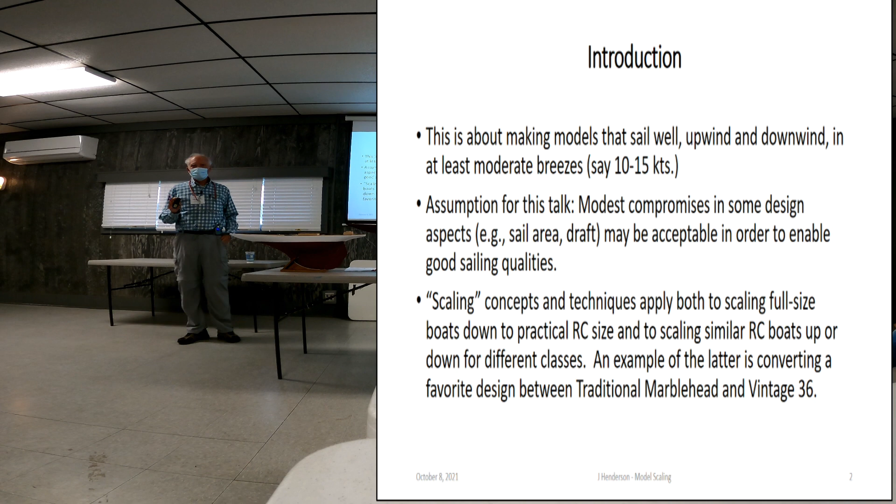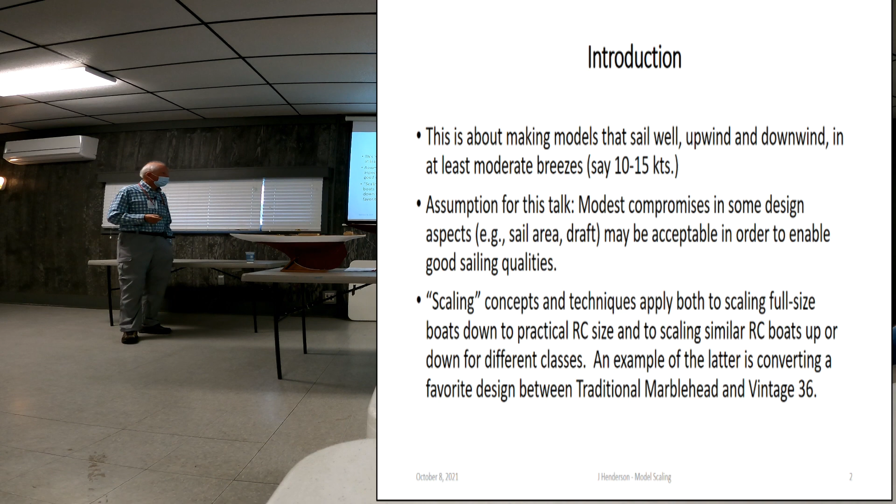The trick here is we want models that look as scale as we can make them, but that sail well in at least moderate breezes. I'm going to assume for the purpose of the talk that you're all willing to tolerate some modest compromises in the design in order to enable good sailing. This will apply whether you're starting with a full-size boat and scaling it down to model size, or whether you're going up from one model to another, or down, say, from a Traditional Marblehead to a vintage 36.

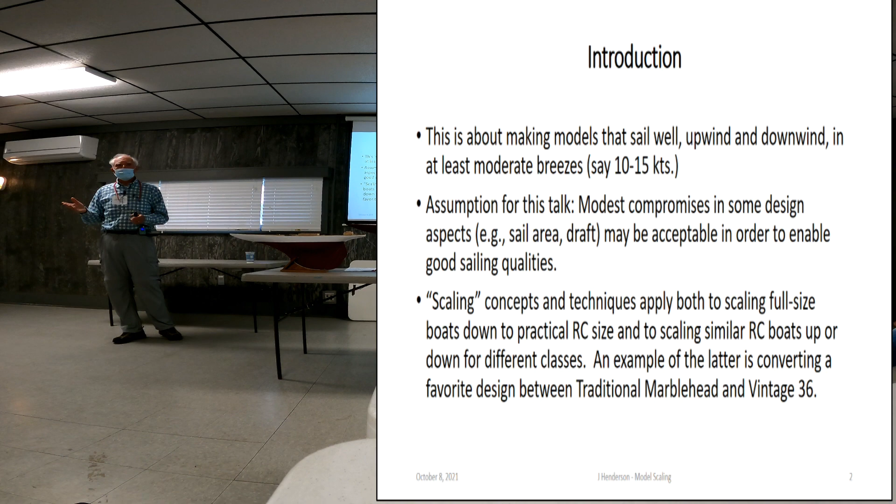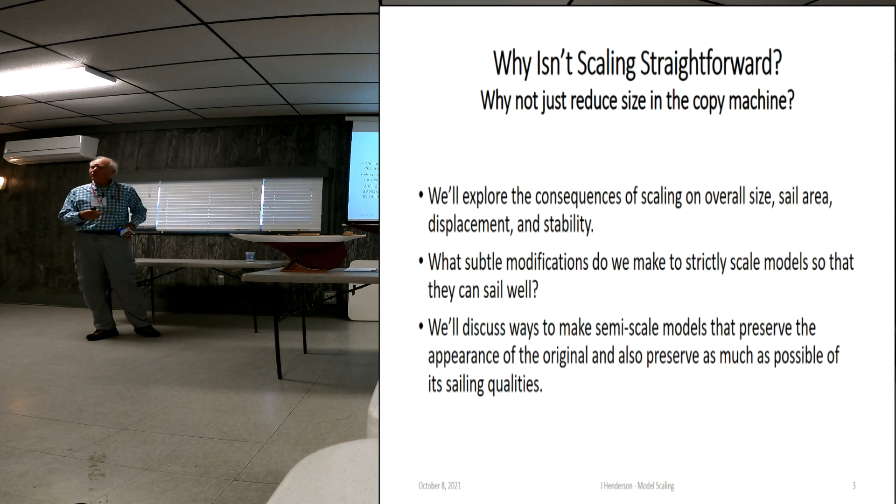So why do we need to talk about it? Why can't you just take it to the copy machine and reduce the size? Well, it turns out it just doesn't work that well, and the talk is going to make you understand why that is and what we can do to mitigate the problem.

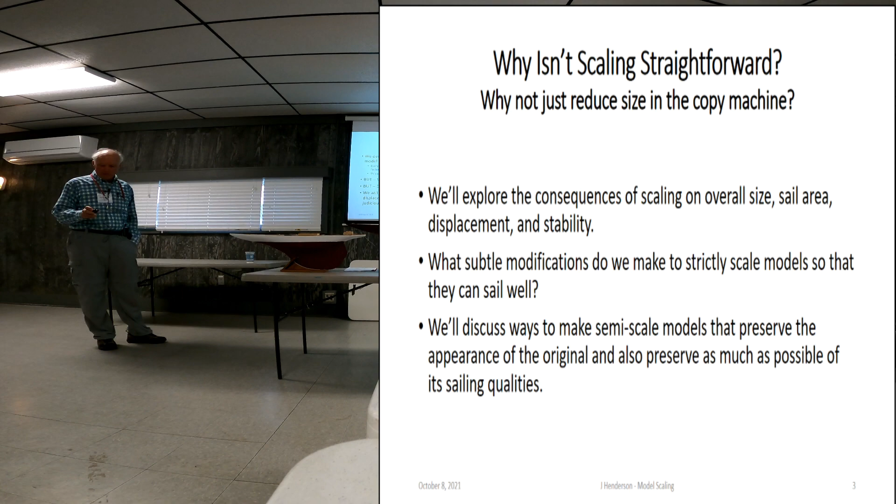The fundamental concept, and I'm going to beat on this fairly hard for a few slides, is that we're going to imagine scaling by some factor. I'll pick 10 to make the arithmetic easy. That means every linear dimension on the boat — the length, the waterline length, the beam, the draft, the luff of the sail, the foot of the sail — all get scaled by that same factor of 10. That's what happens when you build a display model. It looks real because every dimension has been adjusted. But, two buts: the sail area is going to go down by the square of that factor, and the displacement is going to go down by the cube. That's the topic I'm going to beat on.

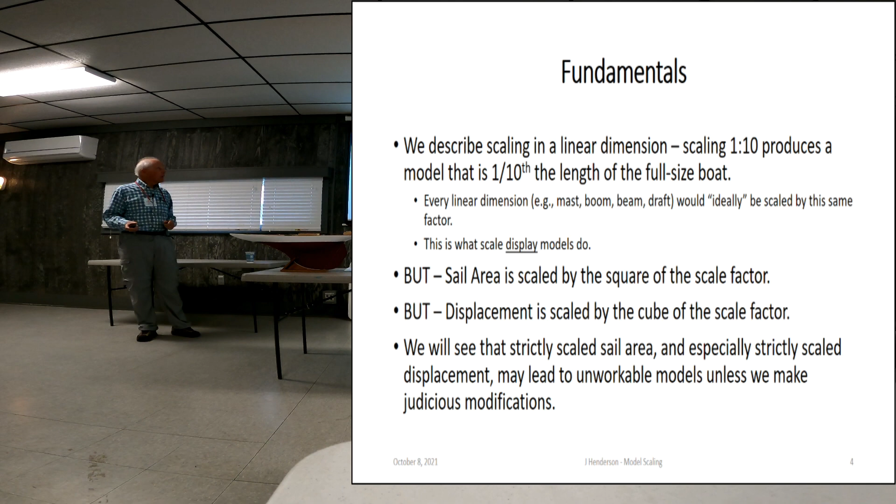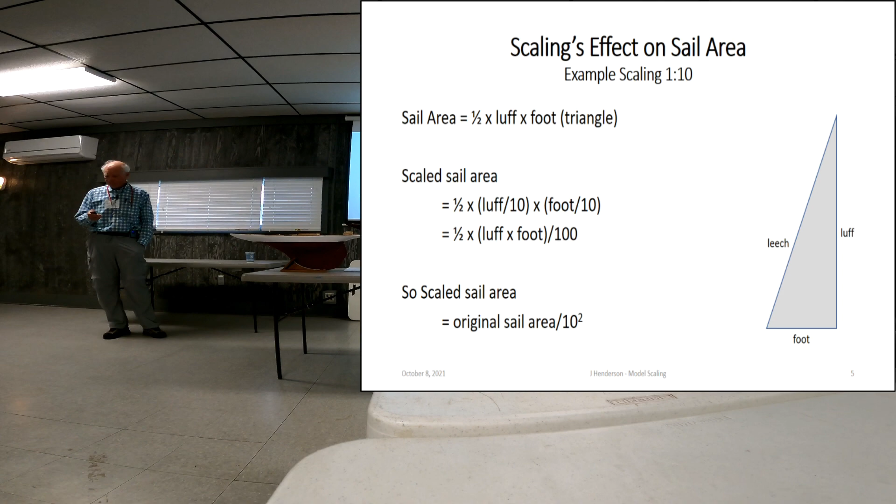Now, to talk about displacement, first I want to set the stage for what I mean by displacement. It's the amount of water — the volume of whatever is beneath the waterline in the boat. That means it's the amount of water that gets displaced when you try to float the boat. From high school physics, Archimedes said that the weight of the displaced water equals the weight of the boat.

The other way to think of the experiment is: take a tub brim full of water, put the boat in it. Obviously water will overflow. If you capture all that water and weigh it, that's the weight of the boat. I've talked about displacement mostly in terms of weight, but it's also volume — in our case, cubic inches below the waterline — and we can relate that to weight because we know the density of water. Salt water weighs 64 pounds per cubic foot, or a more meaningful number for us, 0.037 pounds per cubic inch. So if we know the cubic inches beneath the waterline, we'll know the weight of the boat that will displace that much water if it floats at its waterline.

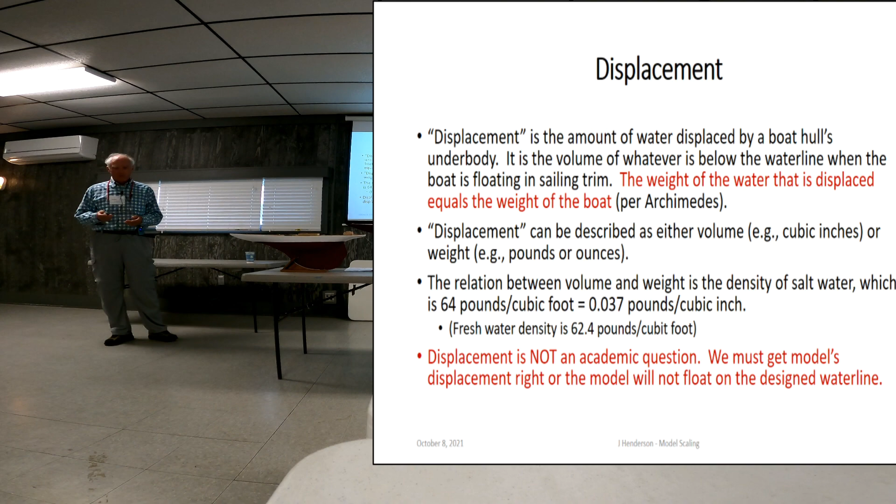Now, I could almost stop — that's the talk, everything else is commentary and examples. But I beat on that because you really need to internalize it. That's kind of a brutal arithmetic when you start applying it to models, as we will see next.

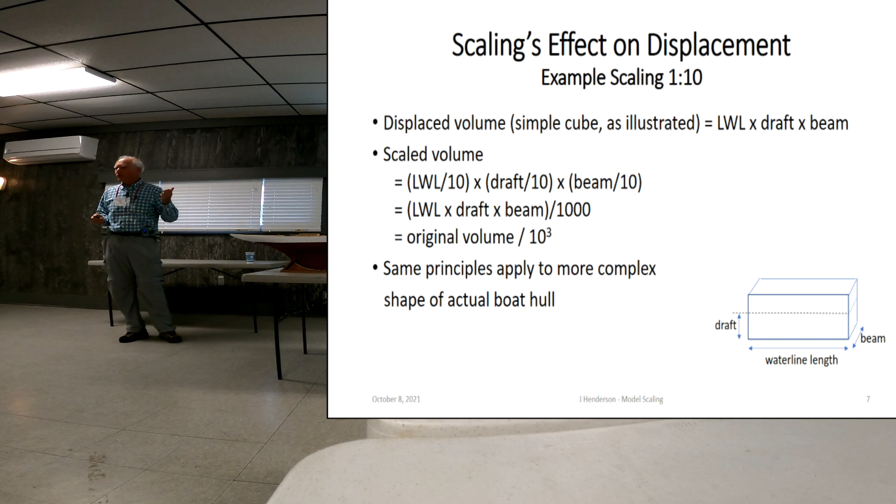So this is a really extreme example. I started with a J class. I picked Rainbow because I had the plans for Rainbow. And I reduced it to vintage 36 size.

And in fact, this is it here. And so now the scale factor, since Rainbow is about 129 feet long, the scale factor works out to be about 43. So that's a big scaling problem. And so we started. So the length goes down to 3 feet because that was the point of the exercise. The waterline length reduced accordingly, the beam.

The sail area turns out to be quite close to the vintage 36 sail area, and you should not take comfort in that. That's actually part of the problem. The original was really over-canvassed by typical boat practice, and the vintage 36 at 600 square inches is no sissy on over-canvassing either. So the fact that it turned out to be close to the 600 square inches allowed actually meant even more worry for getting a scale boat that would work.

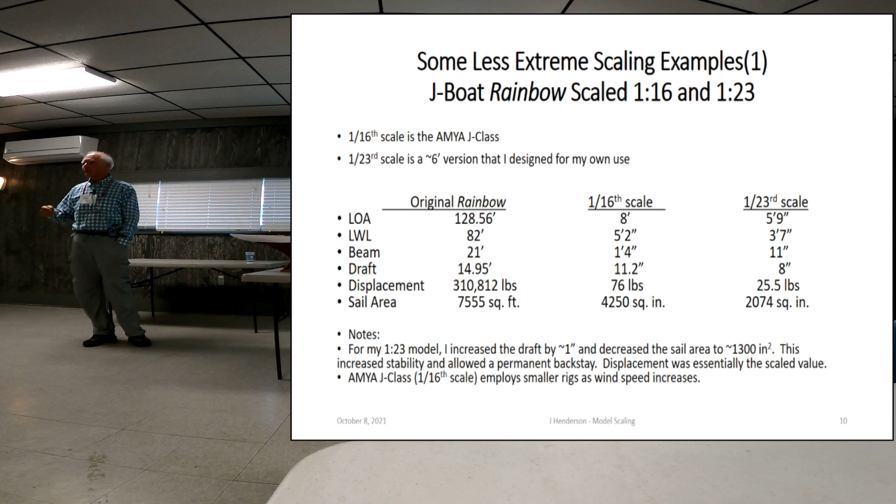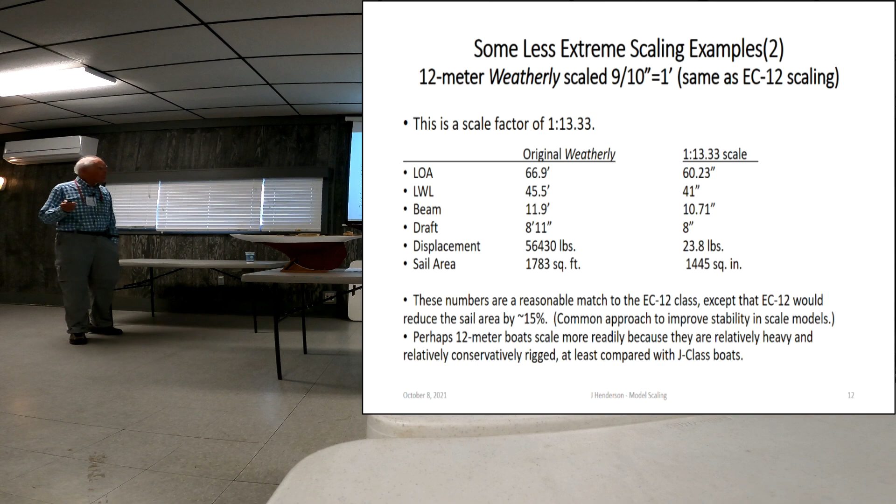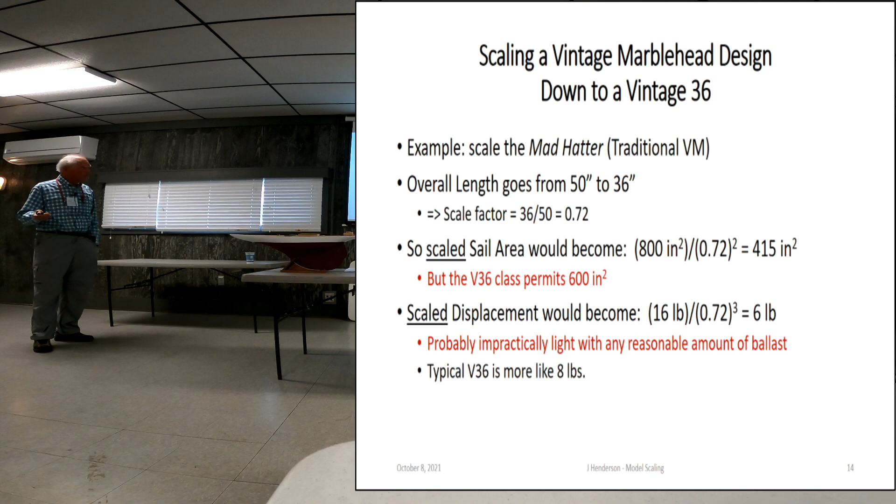So how do we deal with that? Let me first summarize what I think are the trigger points that should generate your questions if you're considering scaling down a model.

First of all is the relative weight and sail area of the full-size boat. We saw that the 12 meters scaled more readily than the J boats, and the J boats were probably even easier than some of the earlier America's Cup boats. I suspect working schooners would be sensibly rigged, and therefore might be good candidates for scaling without a lot of work in the underbody.

The model class may impose some issues. If you want to make it a V36, for instance, you've got maximum sail area, maximum draft, and there may be specifications not only on the draft but on the aspect ratio of the keel. Usually there's a minimum chord width that they require. Sail area displacement is a metric often published in popular sailing magazines when they describe new boats, and we're going to talk a little about how that applies to models.

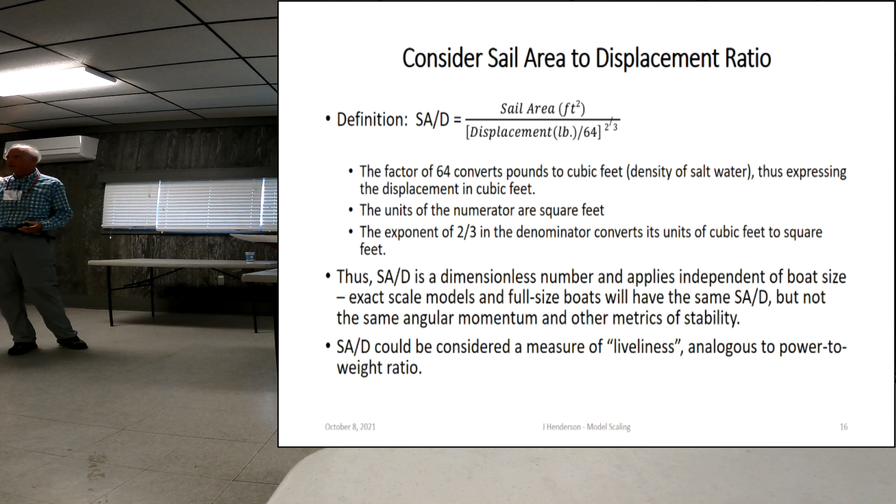But it is a dimensionless number - both the numerator and denominator end up with units of square feet. Dimensionless number means it's the same for all sizes, so your model boat will have exactly the same sail area displacement ratio as the full-size boat if you strictly scale it. That does not mean it has the same stability. Stability is a function of a whole lot of other things, like angular momentum, for instance, because how quickly does it respond to puffs, and how much the boat weighs. It's sort of fundamental - big boats are more stable than little boats, even full-size big boats are more stable than full-size smaller boats.

Remember the Fastnet race of some years ago, when there was loss of life and loss of boats - the small boats suffered more, and that's simple physics. Well, not simple, but physics. I think sail area displacement could be considered more a metric of liveliness - it's like horsepower to weight ratio in a car. It's a little bit related to stability, but it's not a determinant.

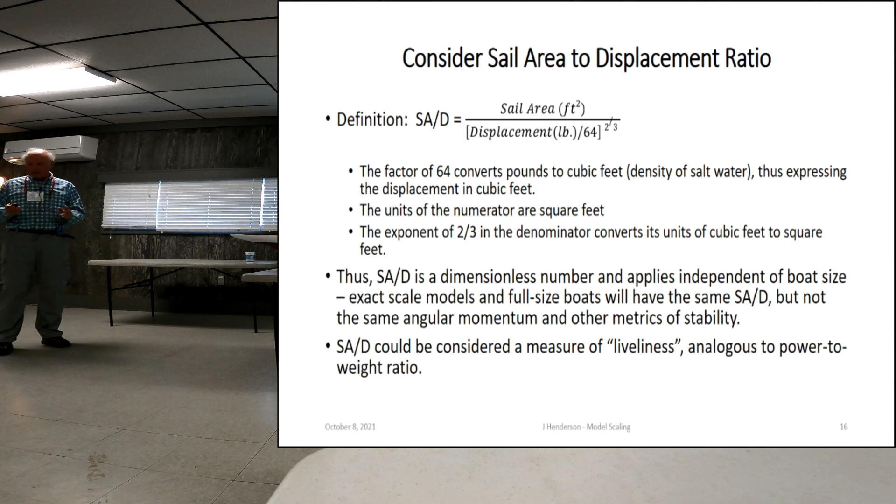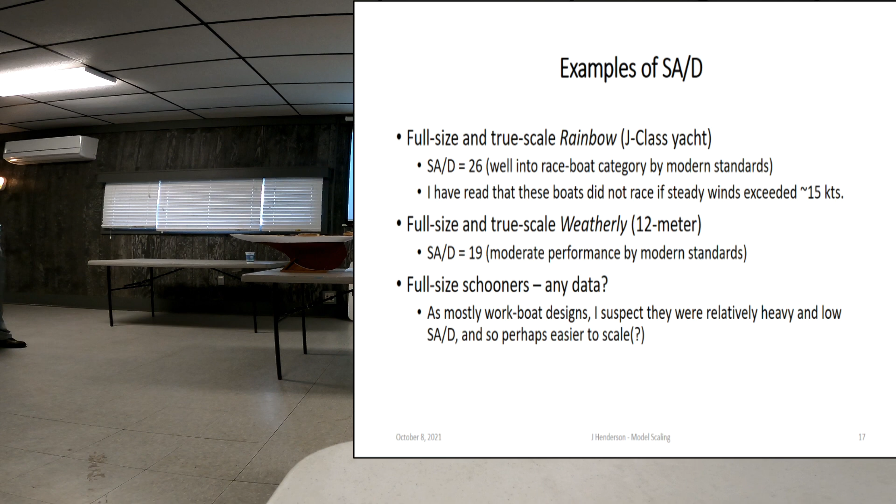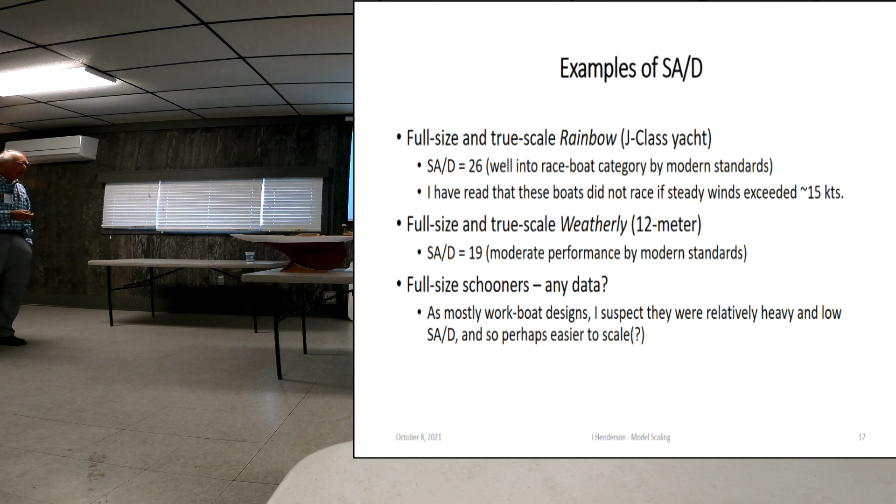So just for numbers here on full-size boats: the Rainbow, a J-class, would have a sail area displacement ratio of about 26, and that's well into the race boat category by modern standards. The 12 meters would be more moderate, with a sail area displacement of about 19, and today that would be considered a lively cruising boat, but not a full-out race boat. I don't have data on full-size schooners - if someone does, send it to me, because I suspect they would be relatively conservative also.

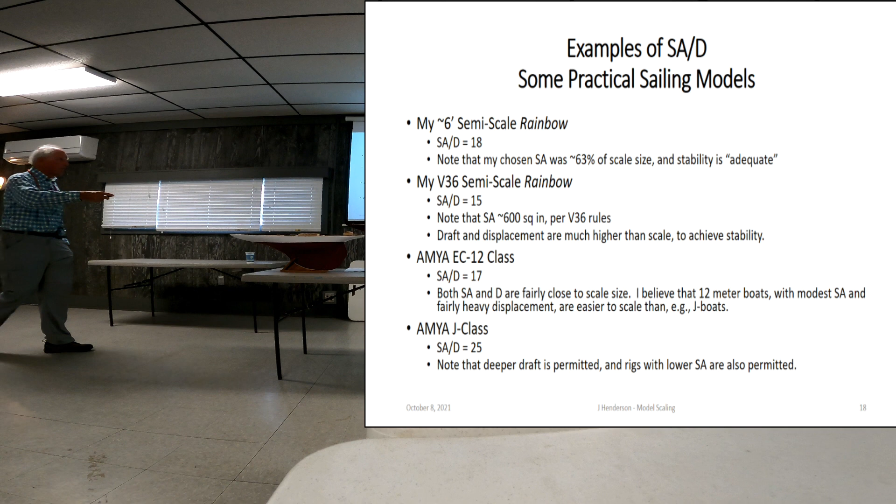Now, some sailing models. This one, the 6-foot Rainbow, has a sail area of about 18, which is more like the 12 meter. It's certainly not as aggressive as the full-size J boat. My smaller Rainbow, this one, is only 15. Again, smaller. I thought I had to be more conservative about that.

The EC12 class is 17, which compares. It's a little bit more conservative than the full-size 12 meter, but it's comparable. And the J class, the same way, just a tiny bit more conservative, but very comparable. Although both those classes permit smaller rigs when you need to, so that's their workaround.

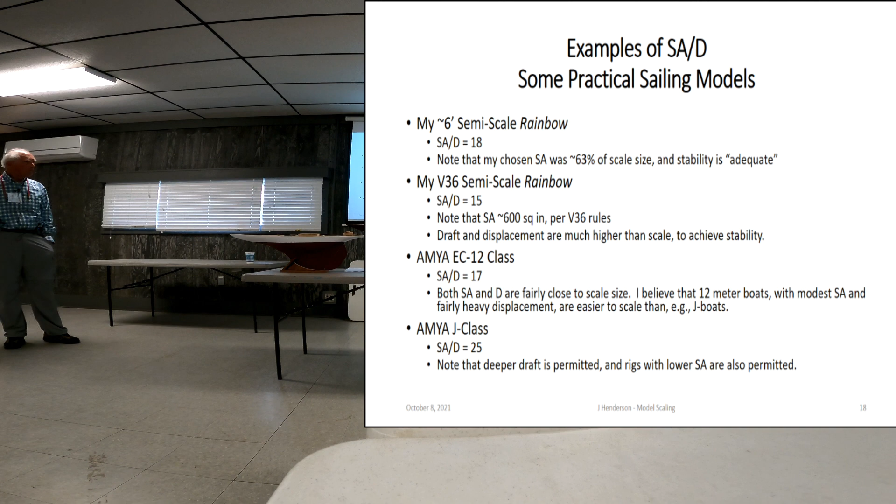All right, to apply all this, you've got to look at the lines drawings of the boat, and I love these lines. Okay, this is Rainbow. It's a Starling Burgess design. These are his drawings, and our models won't have those many lines in them, but all the elements are there.

There's the profile view, the sections view here, and the top half of this is the water lines, which run this way. Those are the key elements of any set of plans. Those would be the elements of what you buy if you ordered plans from our website. And they're what we manipulate to make the changes we need to make, and these are the things that instruct us in what the shape will end up being.

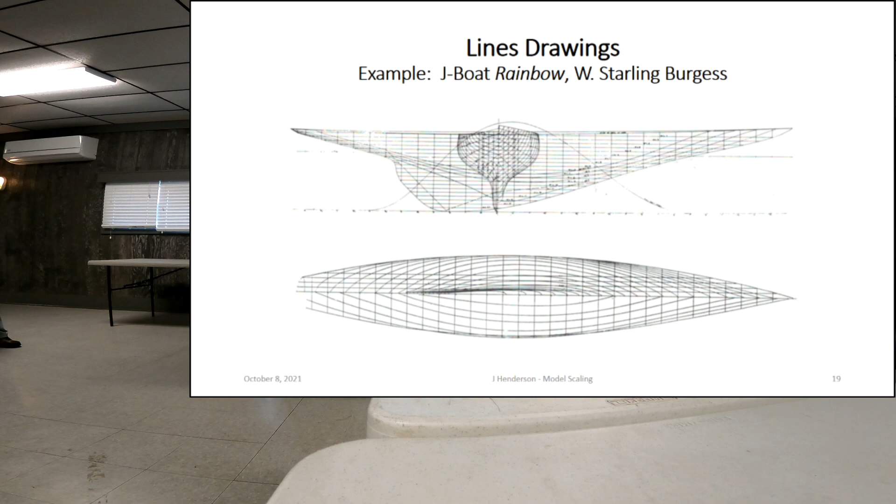So these are the same drawings but simplified. This is more like what we would buy for models. Again, the profile and the sections and the water lines. Now the profile shows vertical lines here, and those correspond to these sections.

Now there are these horizontal lines. The main one right here is the load water line. Imagine if you slice the boat this way. As you get down here, these lines are going to reveal the underbody shape, and that's what we're seeing here. This curve that I'm trying to trace out is the load water line.

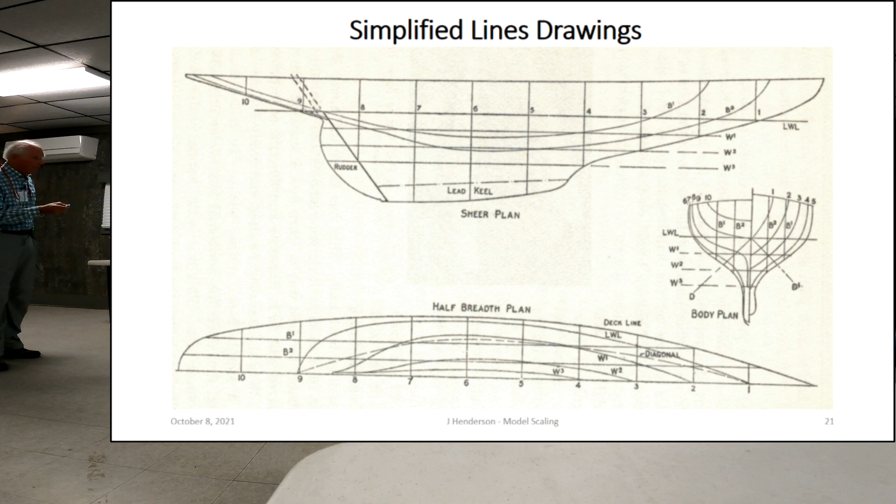This one is a parallel line to that, but below it by this distance. And then there's another one here and here, and the outer one here is the sheer line, the deck line. And you can see right away there's some odd things happening. See these funny little curves back here? The water line comes around like this, the lower ones come in like this, and that's what's going on in the back of the boat, in front of the rudder post.

And it's a characteristic of full keel boats like this, that back here, the shape changes dramatically. We're going to talk a little bit more about how I worry about that. But here it's revealed, and it's pretty brutal.

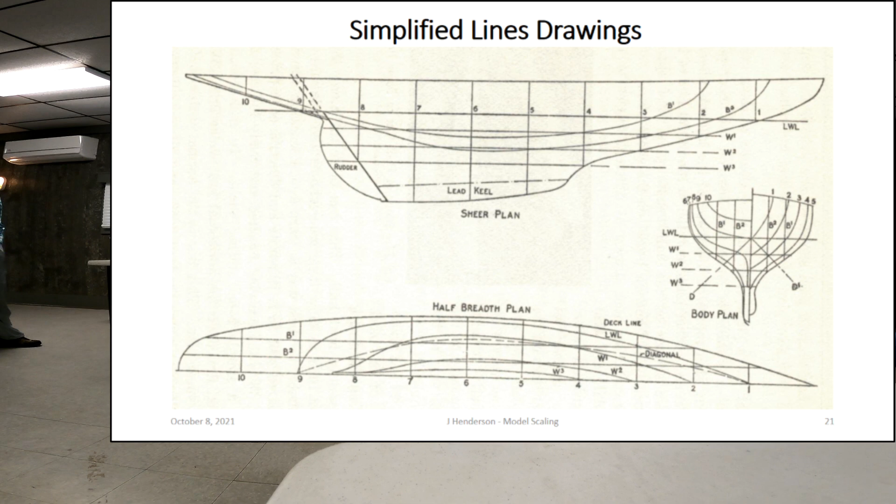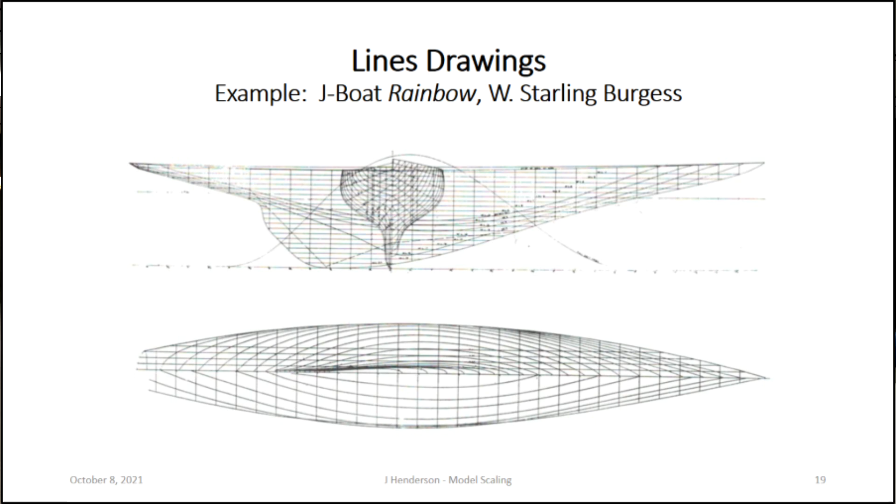Can we go back one? Yeah. You can see Starling Burgess, there's some of that, but much less. This was a boat with less underbody volume than the next one. And one of the consequences of that is the shape.

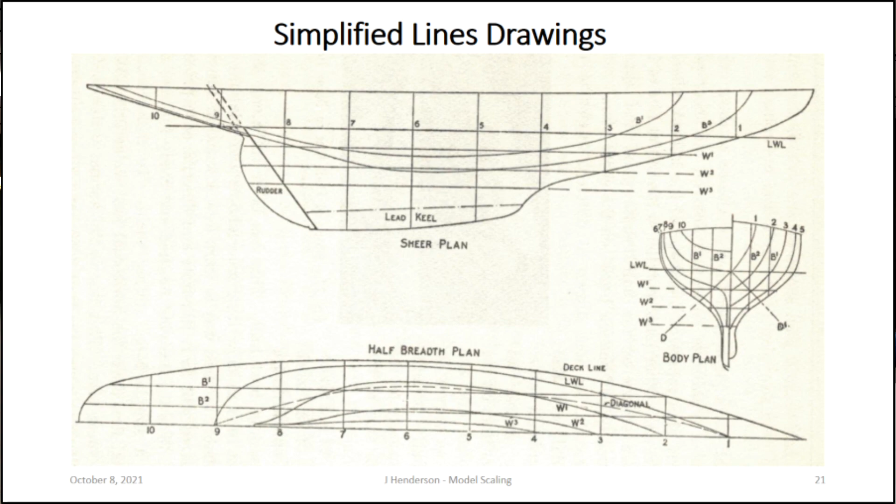Okay, let's go on. I've talked about most of this, I think. The three views: one, the profile, the sections, and the water lines. Let's go ahead one.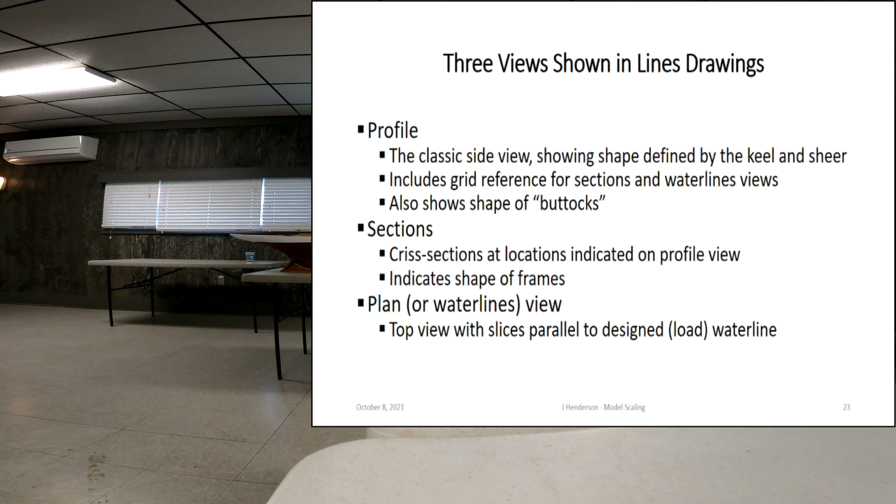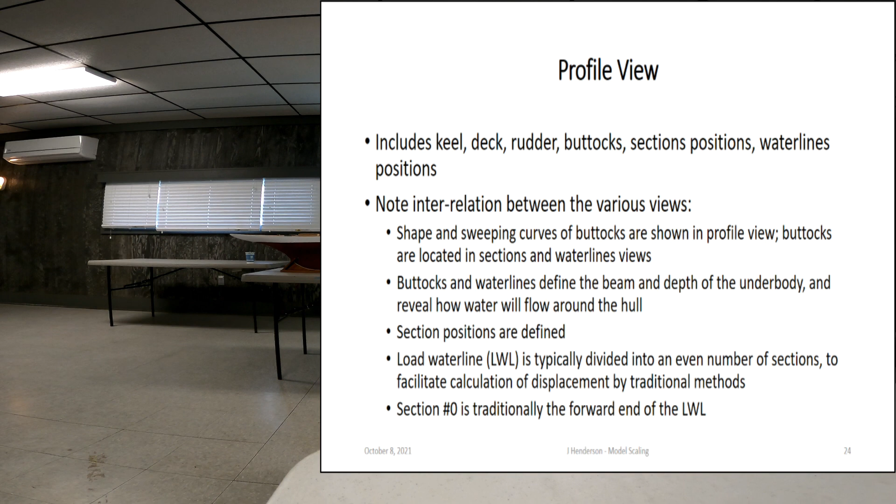The profile view, I did not show buttocks. Can we go back to? Yep. These vertical lines here, these are lines I'm talking about that would slice the boat parallel to the center line, only moved out toward the maximum beam point. And when you plot them, viewed, so you make that cut and then you view it, right? So if you did, the profile comes out like this, but these others would be smaller and follow curves like this.

And that shows kind of how the water's got to flow when it's passing under the boat. But also, deeper, heavier boats, with these buttock lines would curve down more. And that's a warning. I mean, sometimes you just have to do it to get the volume you want, but that will have impact on wave making and therefore on speed.

So I'm going to beat on that again a little bit more, but I want you to try to remember, when I talk about the buttocks lines, it's this curve here that I'm talking about. The slices parallel to the center line of the boat, but further out. Okay, ahead. One more.

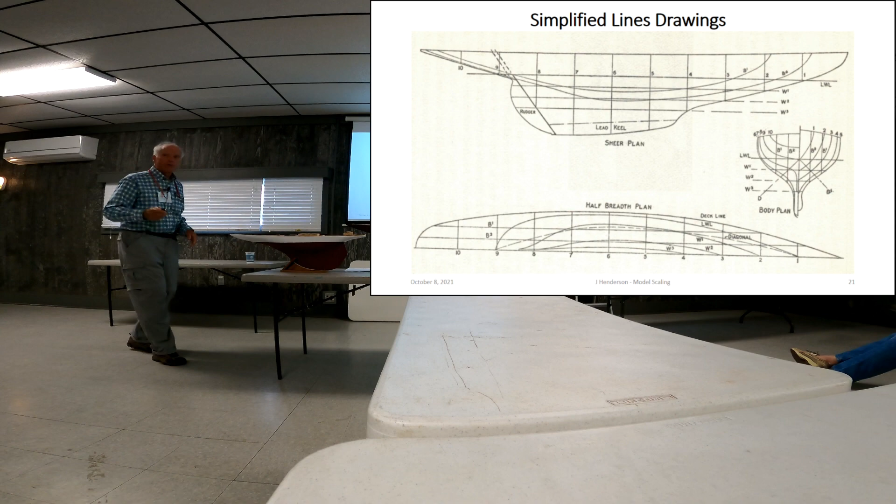Okay, the sections. The sections are the slices across, like this.

We use those as the basis for our frames or molds when setting up the building board. Those sections are usually drawn to the outside of the planking. In fact, almost always, and if they're not, there'll be a warning on the lines that they're not done to the outside. They have to be done to the outside because they're used for calculating volume, so to know the volume of the underbody, you have to go to the outside of the boat.

When you use those as the basis for your frames, you have to remember to take away the thickness of whatever planking you're going to use. I typically use 1/8 inch planking, so I'll lay out the sections full size and then reduce them all the way around by the 1/8 inch thickness of the planking.

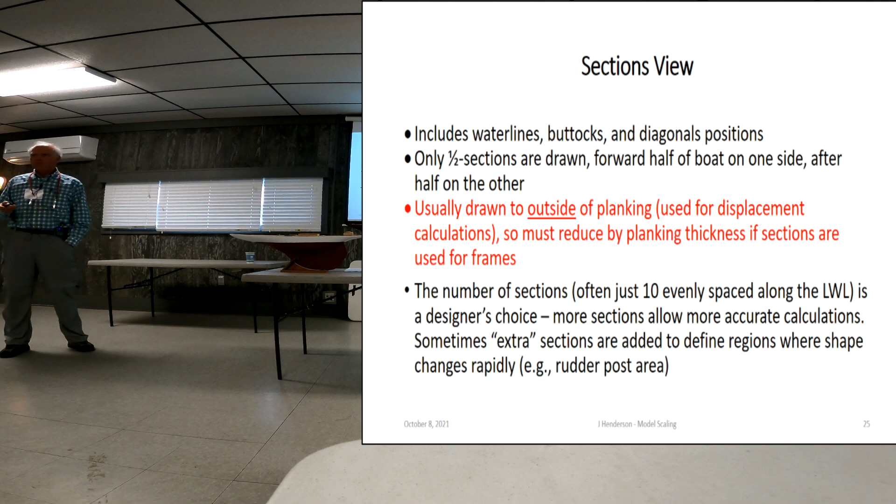The number of sections, almost always at least for traditional design practices, will be an even number along the waterline. You have an even number of sections evenly spaced along the waterline. The number is a designer's choice, but that enables displacement calculations.

I won't have time to go through that, but one of the articles I wrote in our journal talked about some displacement calculations. The key thing is Simpson's rule. If you want to look that up, check Simpson's rule in something like Skene's Elements of Yacht Design, and it'll explain how and why we need to do the sections like this.

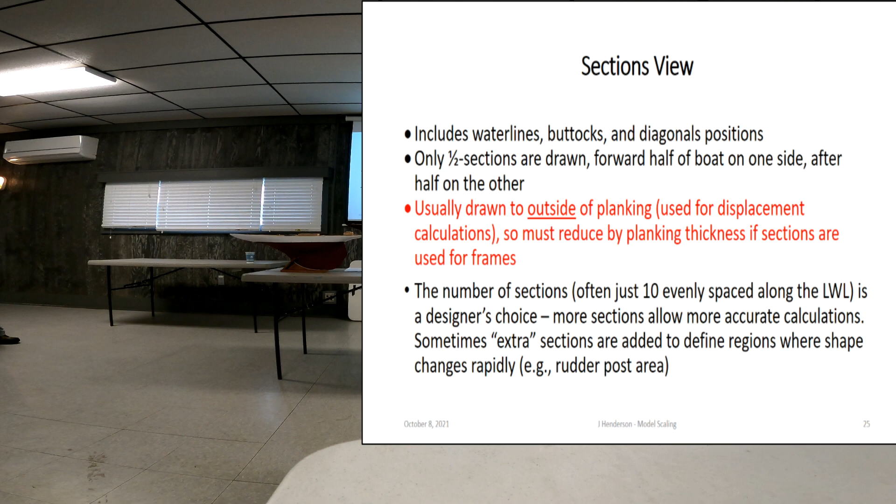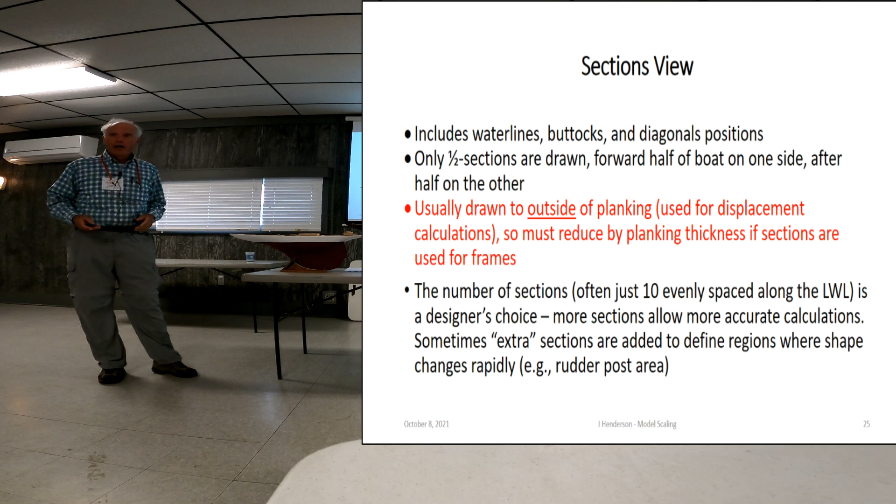We might want to add extra sections on the drawing and in our frames, back in areas where we saw how the lines changed. If you want to add them, think through how the drawings work, look at the profile and the waterline views, and make yourself a new set of sections in between the ones the designer provided.

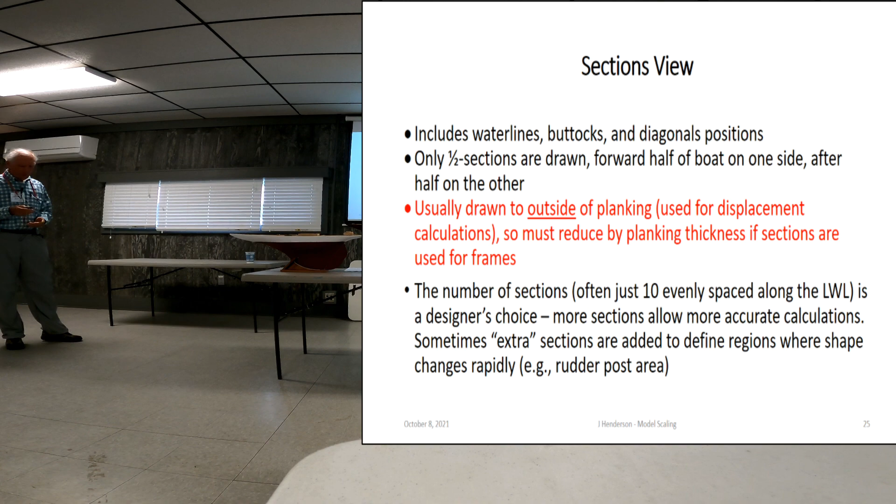Okay, I think I didn't talk about diagonals, but we can go ahead. I think designing boats is not for sissies.

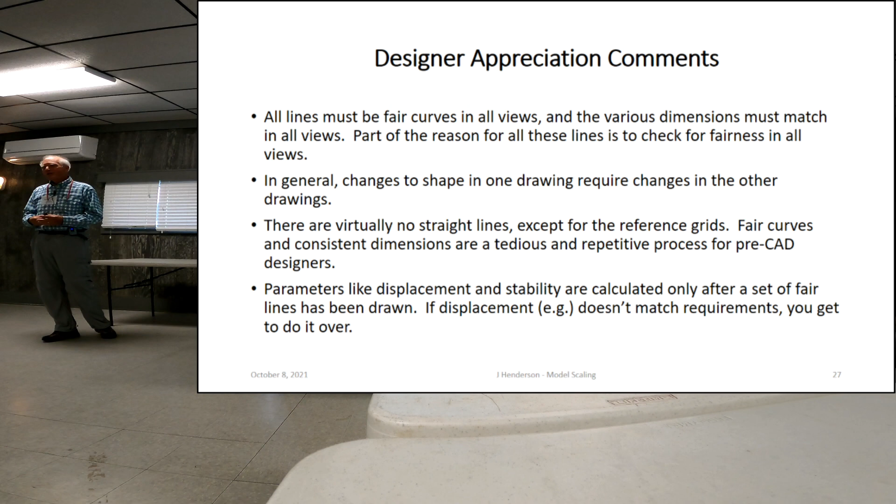It's tricky. It's not like houses where everything's straight lines. The only straight lines on the plans are the reference grids, which don't show up in the boat anyway. So all of those curved lines have to be fair individually.

They also have to relate perfectly to each other, so that the width of the waterline as shown in the waterlines view has to match the width of the waterline shown in the sections view.

The typical design process would be you start with a profile, because that's the thing you think of first, and then maybe you draw the middle section, the biggest section, to get some idea of the shape of the boat. Then you start filling in other waterlines and other sections.

After a while, unless you're lucky or more skilled than I am, you box yourself into a corner and some of those lines don't make nice fair curves anymore. And if you fix up the one that wasn't fair, then you have to go back and chase down all the changes you have to make in the other three views to make it work. So get yourself a big eraser, because it's a lot of redoing.

After you're all done and you think the lines are really pretty and you've drawn your waterline, then you get to calculate the displacement. And if it isn't as big, or if it's too big, then you get to do it over. So if you undertake this, even for modest things like scaling, where you have a pretty good starting point, it's still an iterative process.

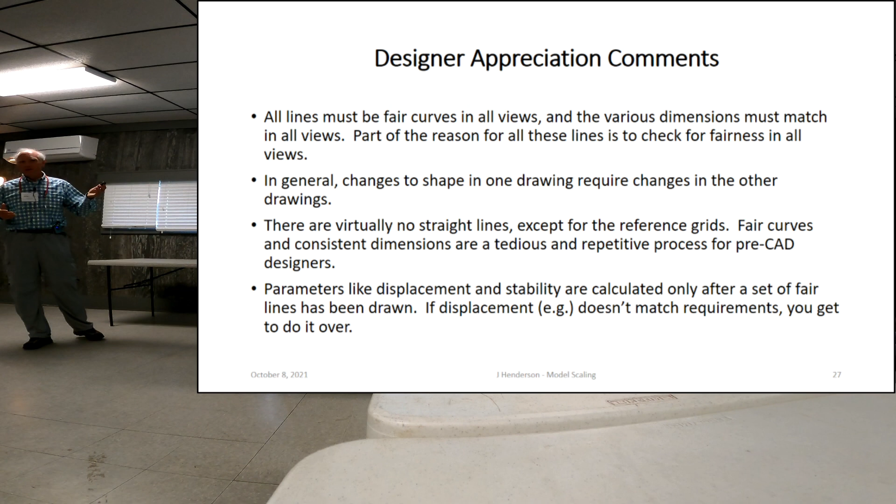These are the lines drawings for the Vintage 36 Rainbow, which was the most aggressive scaling of anything I've talked about. If you try to hark back to Starling Burgess' original lines, you can see some changes. First, the good news: if this is the waterline here, above the waterline it looks like a J-boat. That's almost an exact scale of his above the waterline.

Below the waterline, in profile, you can see that it's much deeper than the scale would have been, even deeper relatively than the larger boat. And the sections—his sections would have curved in a little bit more, but to get volume, I brought these down more like this.

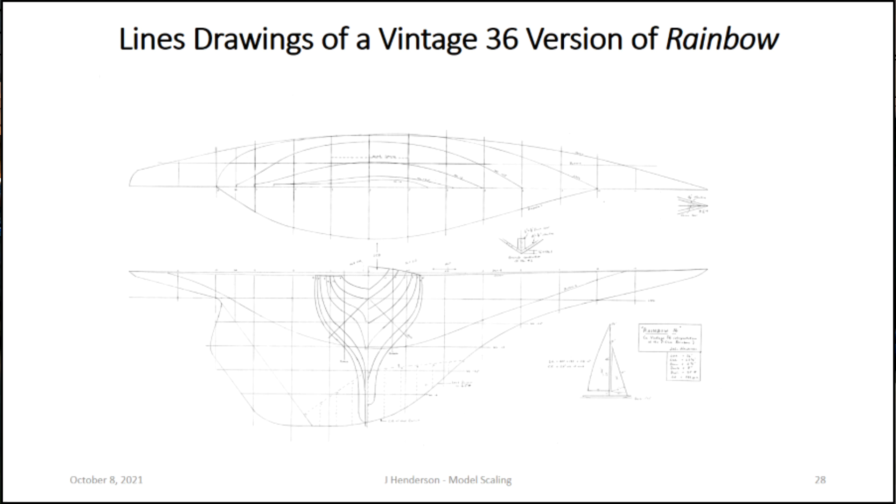So the whole trick here was to gain necessary stability by both increasing the draft and increasing the volume below the waterline. That's what happened to the plans. And I had alerted you before about the impact on the buttocks lines. I have one buttocks line only drawn, but see it curves down like this - that's a much steeper curve than the other one, and that's also a consequence of having to get the necessary volume. Okay, now I'll go ahead one.

Okay. One more? It's loading? Okay. Yeah, this one will be slow, I think.

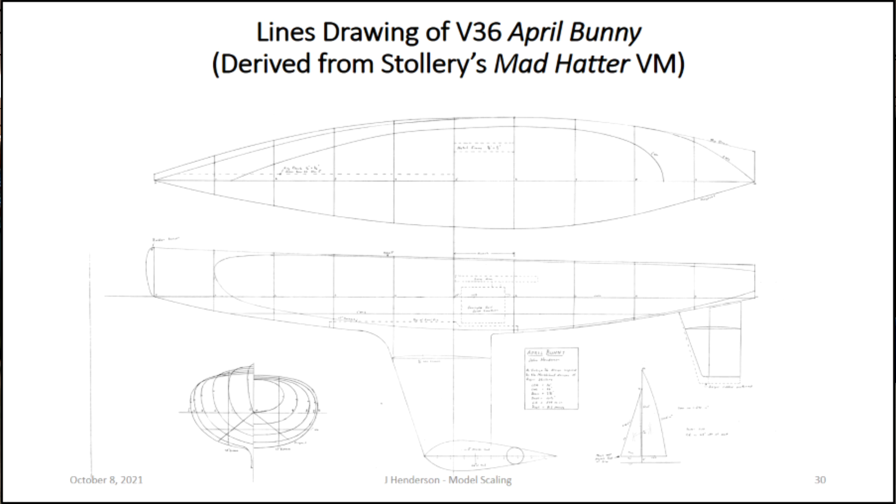All right, and now this is the boat I called April Bunny, which was derived from Roger Stollery's Mad Hatter. As I said when I talked about it first, the visual cue for this boat is the complete roundness of the sections. Not round, but the lack of hard edges in any of the sections. I'm going to show you this a little bit deeper than his, but in general, this made a fairly successful Vintage 36.

And now let's go ahead. Here is clear what I did. The solid line is Roger's Marblehead scaled down to 3 feet, just shrunken on the copy machine. The dashed lines are my modifications to it. The main one here is it's deeper in draft, and that picked up the bit of extra volume I needed to get the 6 pounds scale displacement up to about 8 or 8.5 pounds that I used for the model itself.

Now the draft is also deeper, and that had nothing to do with the scale problem. It's just an artifact or an oddity of our class rules. The draft limit for the traditional Marblehead is 12 inches, and the draft limit for the Vintage 36 is 11 inches, which means the Vintage 36s are actually proportionally deeper. So not being completely stupid, I took advantage of that and gave it a 10.5-inch draft, and I also made the rudder a little bigger. But the big effect here is the change in the underbody to give me a little extra volume.

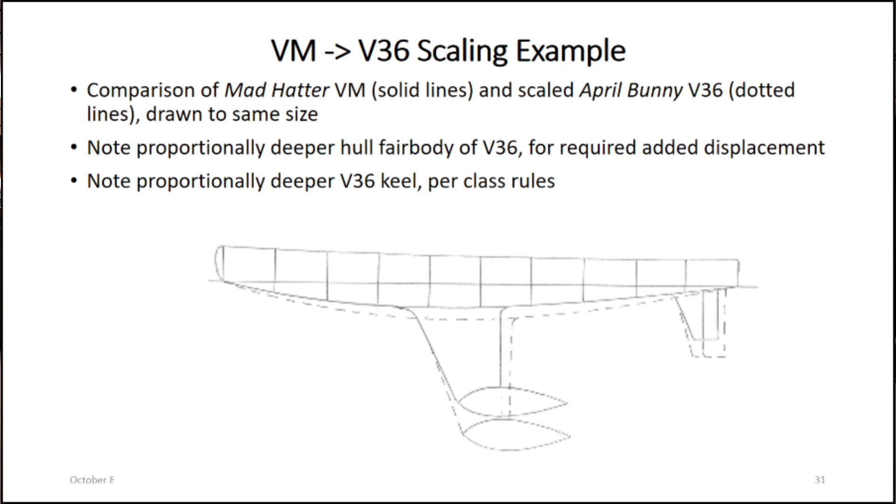Okay, I think we've done this enough. Appearance.

We want it to look scale as much as we can, but we're sacrificing scale appearance on the shelf so that it'll have some chance of acting like a scale boat when it's in the water. And so as many of the changes as possible are going to be in the underbody.

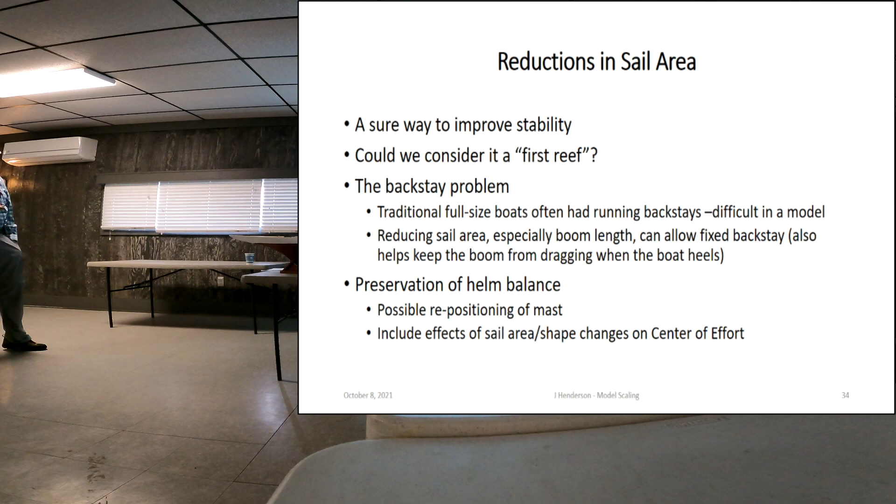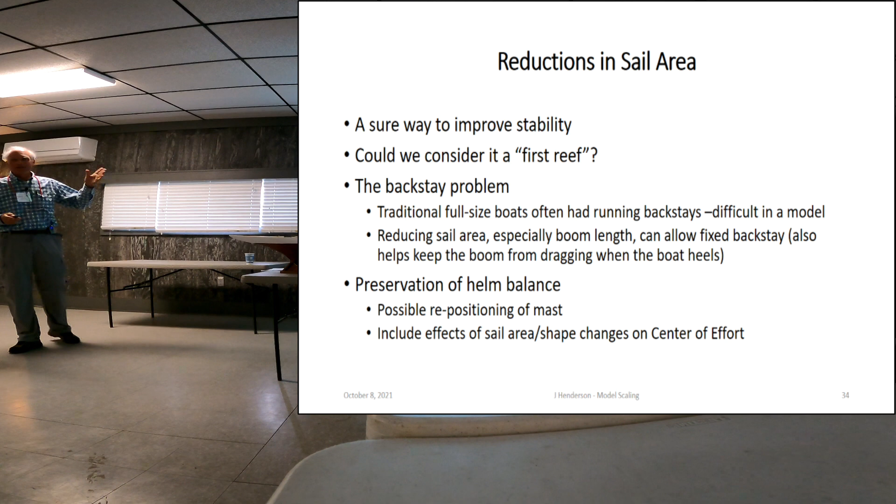We could reduce sail area, and if we're concerned about our arguments to make it a scale boat, we could consider it a first reef. There's another issue though, and that's the backstay problem. Most of these old boats had long booms extending out past the transom, which meant they had running backstays. Well, I suppose we could do it, but it would really be awkward in a model. So one of the ways you can reduce sail is to shorten the boom, and that means you could then put in a permanent backstay. I think the EC12s do that, for instance. That's step number one to make a practical model: give yourself a permanent backstay and reduce the sail area.

Also, when the boat heels, the long boom tends to drag in the water. Now the old boats either didn't have boom vangs, or they had a crew member there ready to release the vang and let the boom ride up when it hits. We don't - when our booms drag, we've got a problem. First of all, you can't ease the sail out anymore, and secondly, you can't steer.

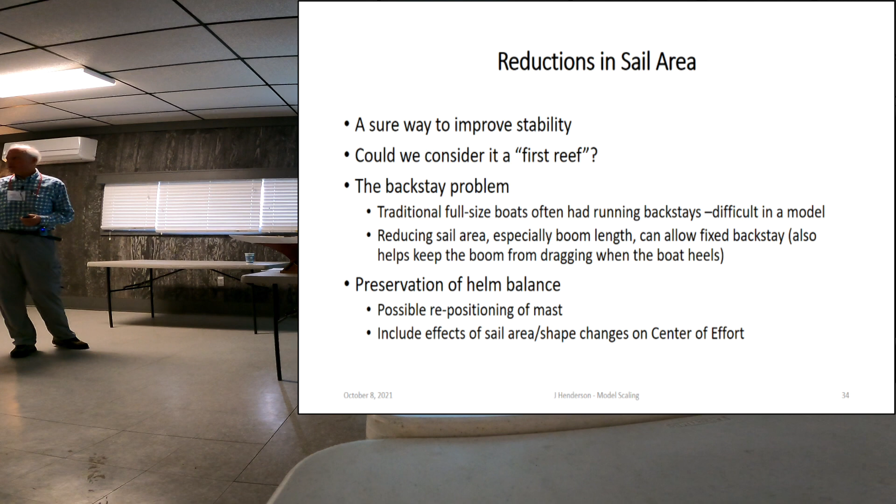And the last thing is helm balance, and by that I mean weather helm versus lee helm. If you reduce the sail area, there's a risk you'll change the center of effort of the sail plan unless you're careful. If you change that center of effort, you will screw up the helm balance. So as you're reducing, pay attention to that, where the center of effort was.

I don't have time to get into calculating the center of effort, it's not very hard, but I think I discussed it in at least one of my articles, and it may be a tech topic in the future.

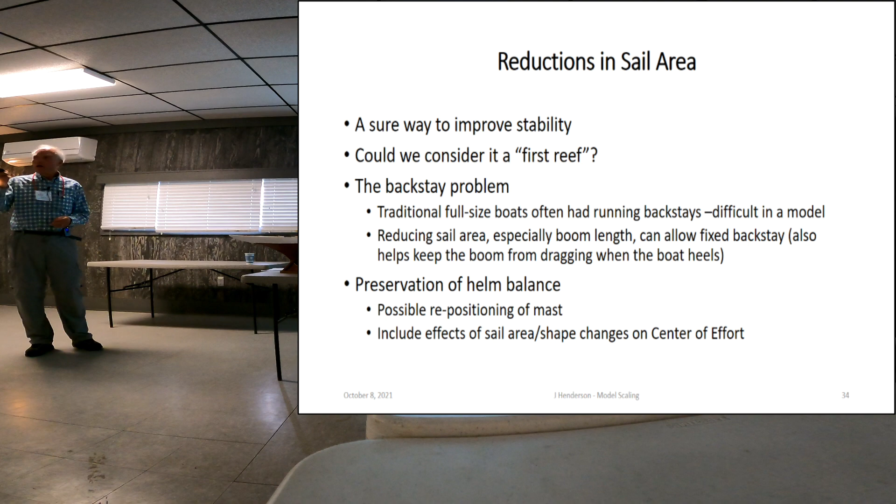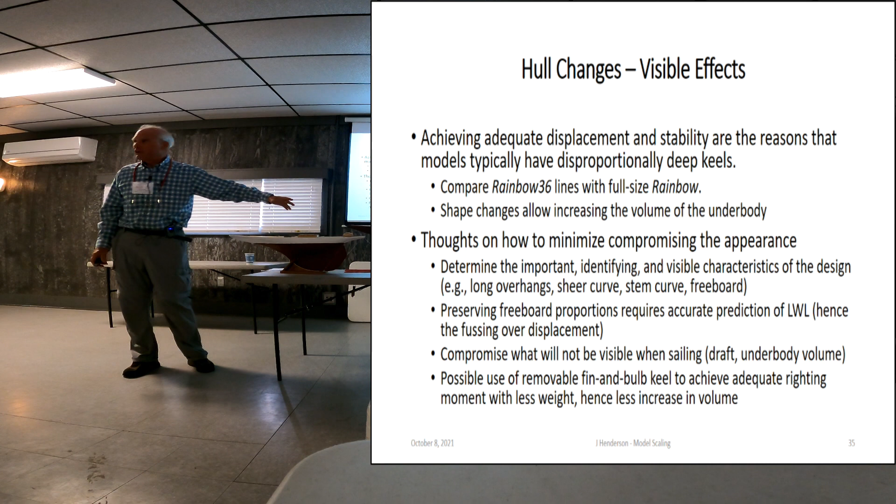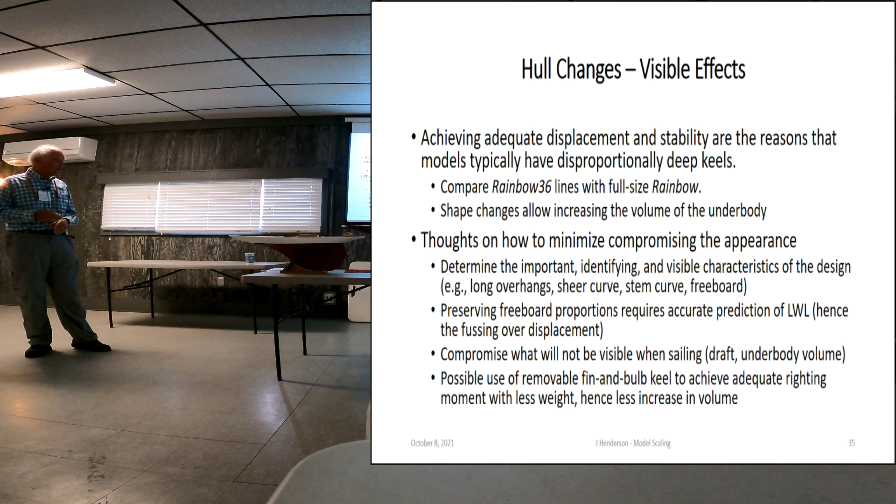Now, the hull changes - the real issue is how do we avoid compromising the appearance? I think the first step is to identify the most important visual characteristics of the model you're trying to do. At J-boats, the visual characteristics are long overhangs, bow and stern - that's a biggie. The shape of the sheer, the amount of freeboard, the shape of the bow. All that stuff is above the waterline, and you want to try to preserve it. I maintain you can compromise below the waterline, and at least in the water, it'll still look like a scale boat. Particularly in freeboard, you really have to know where the waterline is, which is why all this fussing about the displacement in the drawings is not just pedantic.

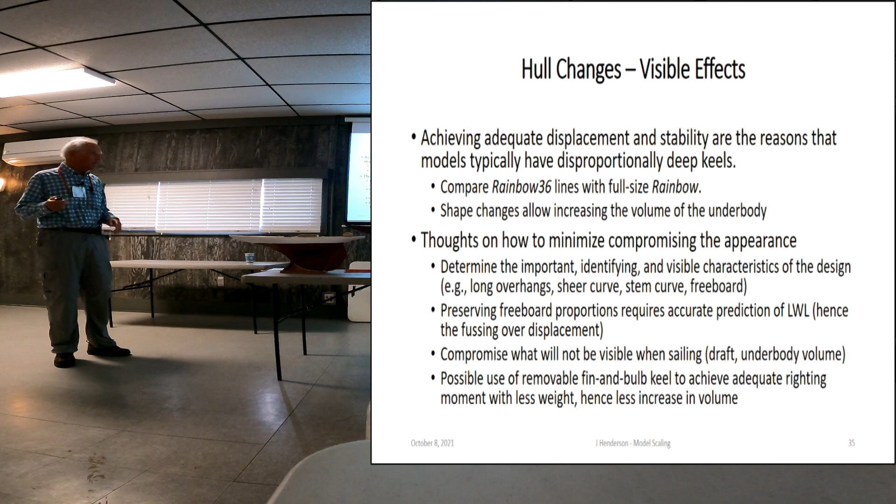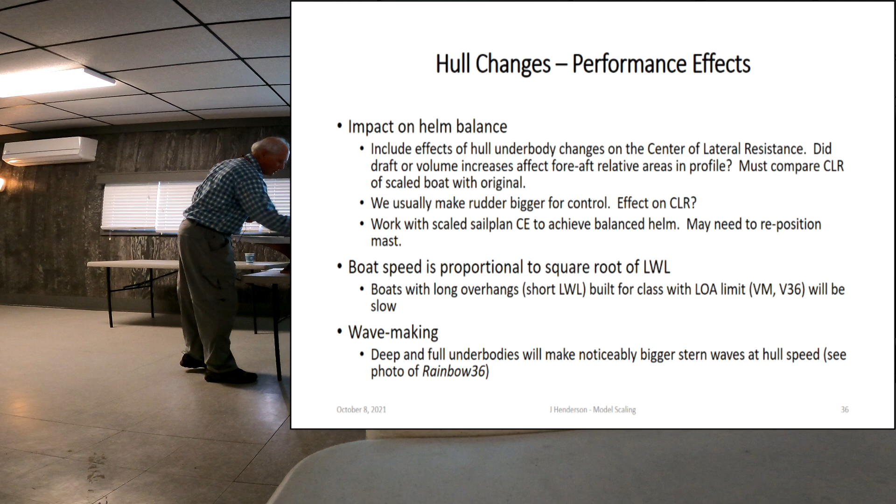Now, if you change the underbody of the hull, as I maintain you have to, there's great risk that you'll screw up the helm balance, because the hull has a center of lateral resistance, which you can think of as where on this boat you would push so that it'll translate sideways without twisting. If I push here, the bow is going to go back. If I push here, the stern is going to go back. If I push somewhere in the middle, it will translate sideways. That's the center of lateral resistance, which balances the sail's center of effort.

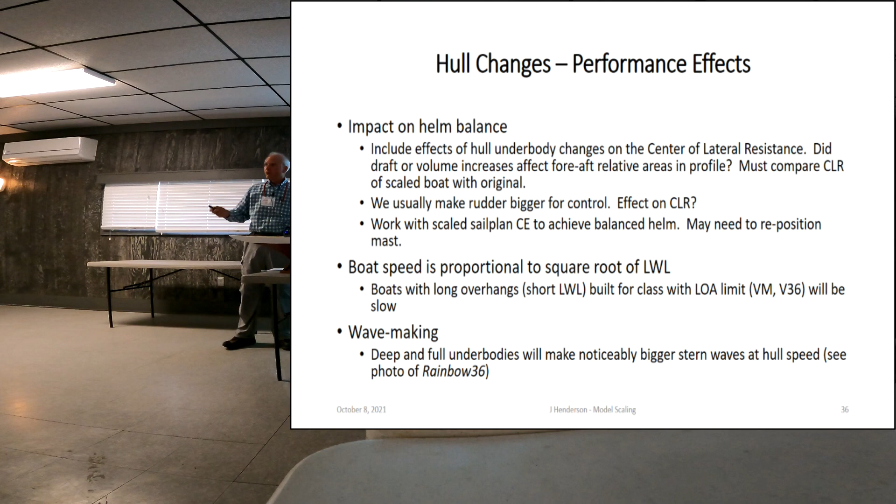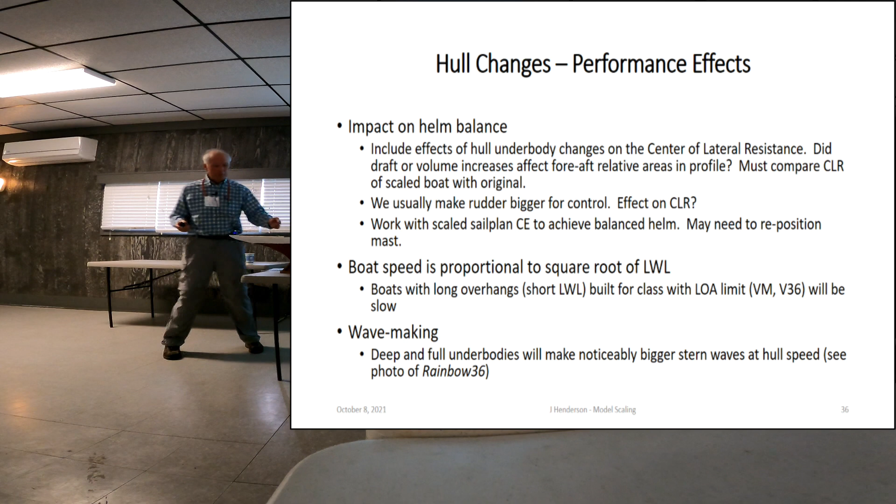But it isn't quite that simple. The way I just described it would make you think you want to put the sail's center of effort right over top of the center of lateral resistance. No. The reason is boats typically sail heeled. When they heel, the sail center of effort will move off to the leeward side of the boat, and when it does, that'll generate a turning torque. So if this boat is heeled toward me, and the sail's out here, it's going to tend to turn it into the wind, which is weather helm. A little of that is good, a lot of it is bad. But in order to avoid that being a dominant steering problem, typically the center of effort of the sail is moved forward of the center of lateral resistance of the hull.

The amount is tricky to determine, and designers frequently get it wrong - it's one of the reasons we have adjusted the mast positions. A starting point would be to put the sail center of effort about 15% of the length of the load waterline forward of the center of lateral resistance of the hull. Determining the sail center of effort is easy geometrically, but determining the underbody resistance is harder. The old non-techie way is to trace out the underbody on stiff cardboard and balance it on a ruler held perpendicular to the waterline - that's the point where the center of lateral resistance would be.

Okay, other hull changes. Oops, I did that - could you go back one?

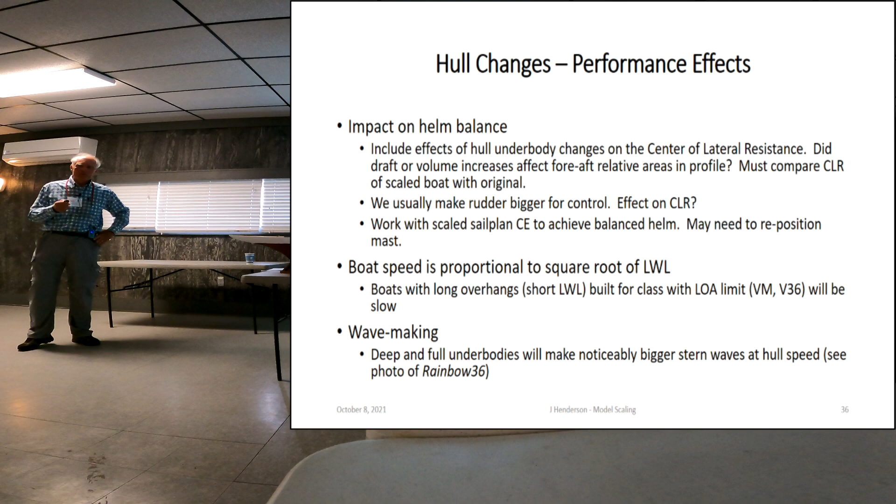Boat speed is proportional to the square root of the waterline, period - that's just physics. The proportionality constant is often written in magazines as 1.34; that's a good starting point. That's the speed of a wavelength of water traveling through the water - the wavelength itself will propagate at 1.34 times the square root of that wavelength. Incidentally, that's why tsunamis travel so fast - they're huge, the wavelength might be miles long, so the propagation speed is quick.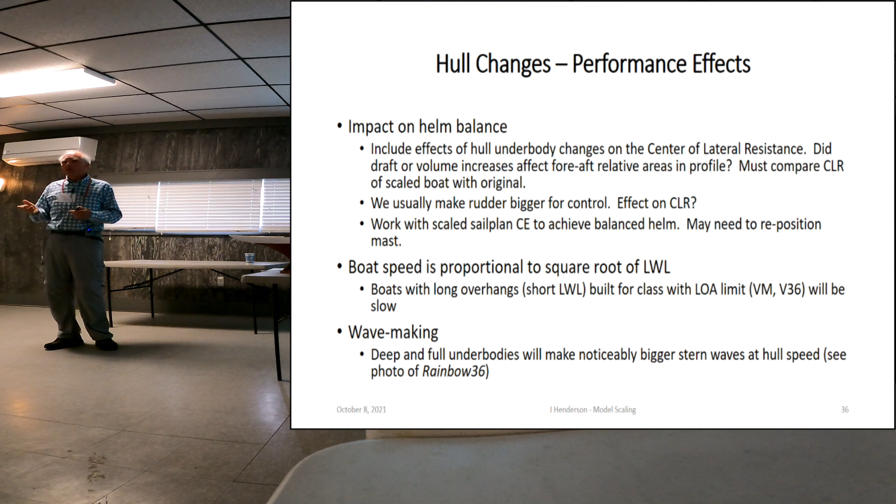Now, how much we're trapped depends on how heavy the boat is, because the heavier the boat, the bigger that wave, the more of that trough. So things like catamarans, which can have long, narrow hulls and are light, can probably get away with more than 1.34 times the square root of the waterline length - they might get up to 2. Barges might be 0.7 or 0.8, I really don't know. But I would guess for our models that 1.1 to 1.2 times the square root of the waterline length is about as fast as we're going to go, period. And they look fast, but they're not really.

Okay, the last point I did sort of hit on. Comments about building - first of all, how many frames? It's sort of your call, it depends somewhat on how much stress is in the model, but I tend to make them at least every 5 inches.

Some people, I tend to leave the frames in and make them ring frames. Other people don't bother with making them ring frames and remove them when the hull is planked, and both ways work. I'm an advocate of extra frames in any area where the hull changes shape.

Like back here on full keel boats at the rudder post area. The strong points really have to be the keel, the mast support, the chain plate, and the jib attachment areas. I try to tie them together - the frames in that area are tied to the keel, all glued up. And the rest of the boat can be quite light, just keeping the water out, but that's where the stresses are.

And of course, we've got to worry about where the hatch is. You want to determine the center of gravity, and then the hatch desirably is pretty close to that, so that all your heavy stuff like batteries and the sail servo can be over the center of gravity.

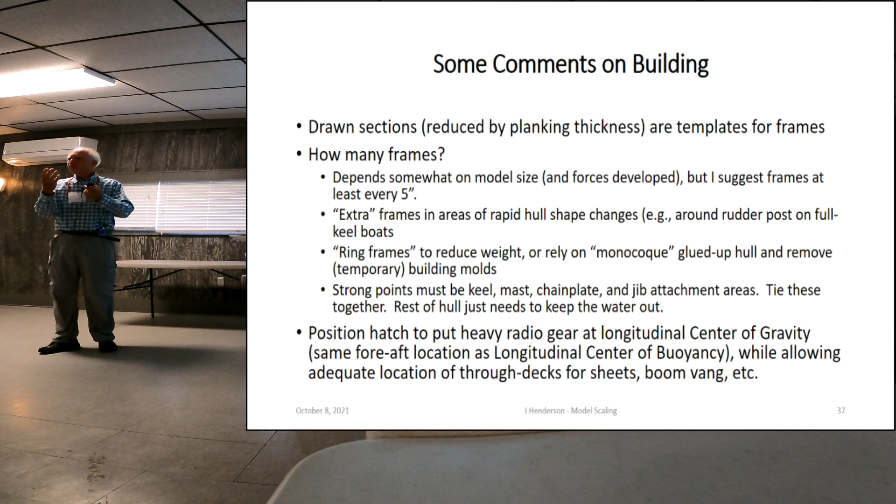You can imagine all the weight concentrated at the center of gravity. The longitudinal center of buoyancy is the same thing, except it's what's pushing up - it's where the upward flotation forces concentrate. And you do want them right over top of each other. If you don't, like if you put the ballast too far back, the bow's going to go up. So if the plans show the longitudinal center of buoyancy, that's your center of gravity.

And you don't even have to float the boat. You can just pick it up on a string attached at that point, and if it balances in the air, it'll balance in the water.

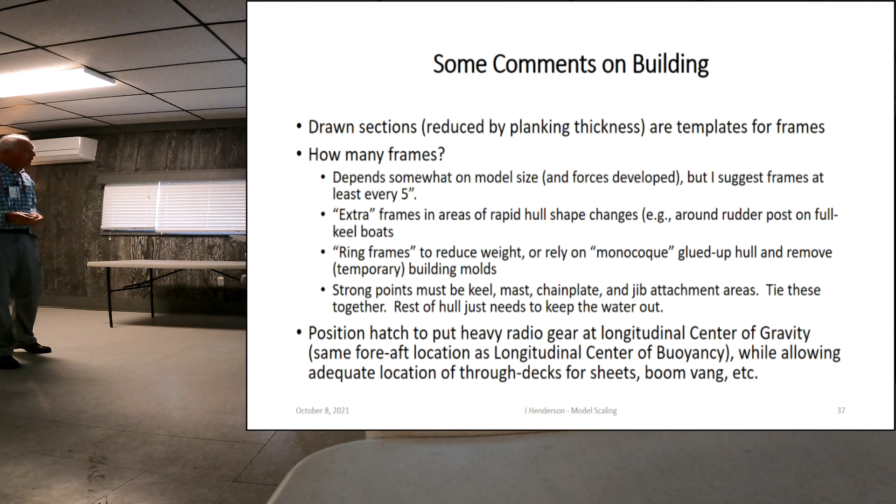If you don't do that, it'll probably work, but the shape won't be as defined as you might like, and maybe adjacent planks won't be so easy to get lined up. And if you only have 1/8 of an inch to work with, there's a limited amount of sanding you can do.